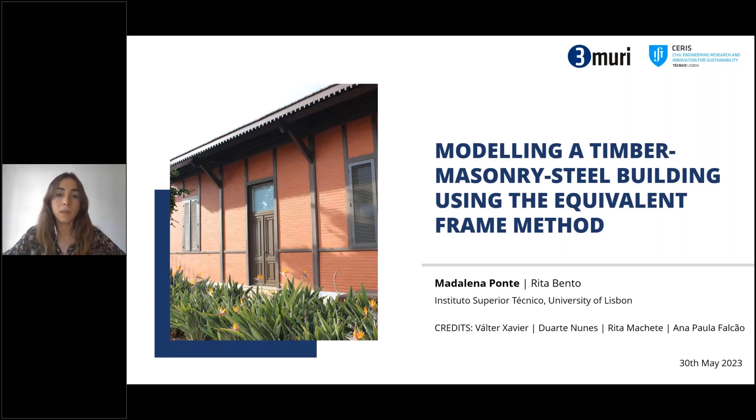This work was carried out in Lisbon, in Instituto Superior Técnico, coordinated by Professor Rita Bento, with a large team of architects and civil engineers. It's about a Timber-Masonry-Steel building using the equivalent frame method, as Professor Pena said.

And I'm going to start explaining our motivation, the case study, which is named the APPI building, the experimental dynamic characterization, then the equivalent frame modeling, the numerical results, and conclusions.

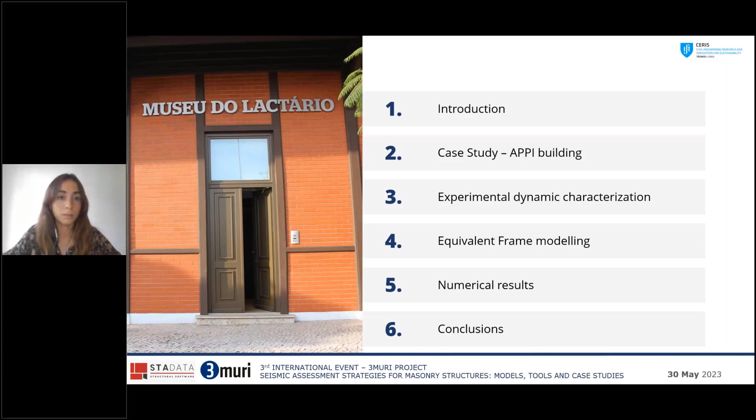So the motivation started with the complaints of vibrations felt by the users of the Association for the Protection of the Early Childhood, which is APPI, the owner of this building. On one side is their museum, and on the other side is their offices. So they felt a lot of discomfort in the offices and in the museum due to the level of vibrations.

You can see the building is very near the river in an area named Santa Apolónia in Lisbon, and a discomfort level assessment was carried out, and what I'm going to present you now is the seismic assessment that came after.

The building was constructed in 1901 in Santa Apolónia, and it was designed by a famous Portuguese architect, Ventura Terra. It is a building representative of the national construction of the epoch for its style and construction techniques, which makes it part of the country's built cultural heritage.

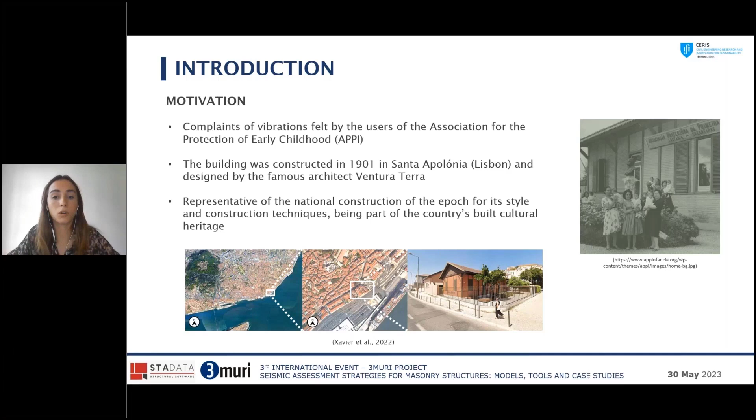The case study, which I will always call APPI to be easier, is almost rectangular, asymmetrical in plan. It's 10 by 22 meters, with walls of more or less 4.8 meter height. To obtain the geometry and the correct characterization of the building, a laser scan was carried out. Also due to the importance of the building, which is a museum, like this we have everything registered.

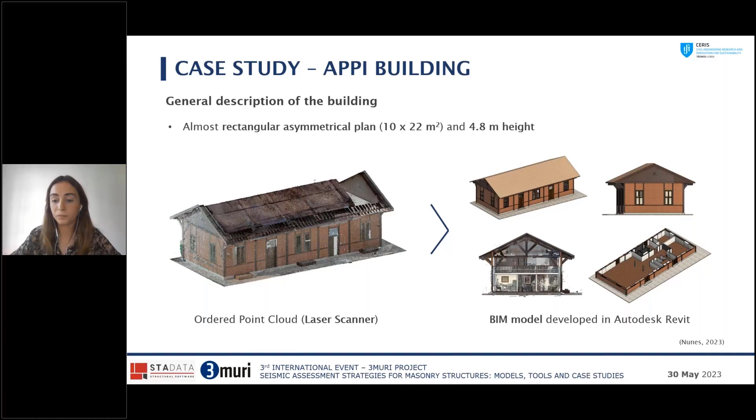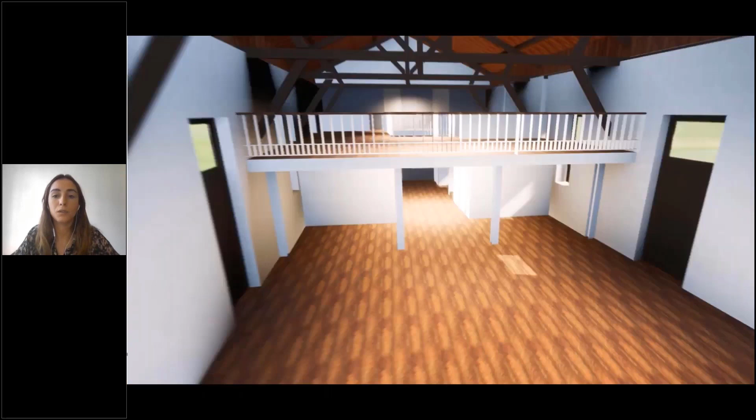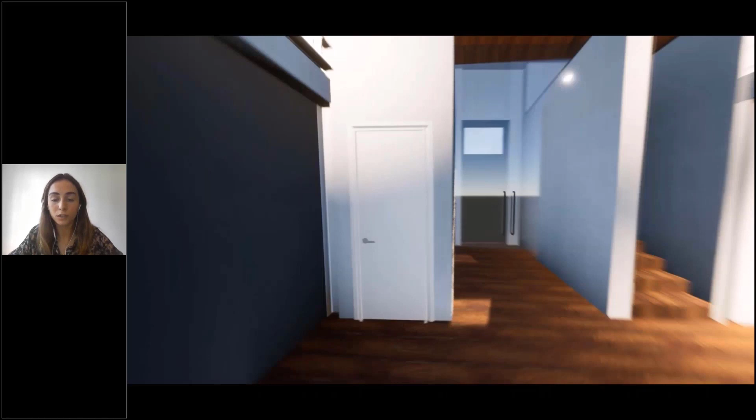The ordered point cloud was created with the laser scanner, and then a model in BIM was developed by a student, which allowed us to then create the numerical model. You can see here we are entering the BIM model. We can see that the building is one floor on this side, and on the other side we have two floors. It is a mezzanine, and here we are passing from the point cloud to the BIM, and this is the part of the offices. So the part with the two floors.

The building structure was renovated in 2014. It had to be completely rebuilt, since it was found out that the majority of the structure was very damaged. So the renovation kept the same exterior layout as the original. They substituted the elements, but they kept the layout with the timber frames and the masonry walls.

But then there was an alteration to the architect's design. They added a mezzanine type steel structure on the inside, as you can see here on the right side of the plan. This is the part of the offices, as we saw in this video. And then on the left side, we have just one story height, which is the museum part.

I also show you the 6 timber frames, because this building, in fact, is a timber building, in which the main structure that carries the loads is the timber frame elements. Actually, this drawing is from NCREP, the company of Alexandre Costa, who just presented before. They did the evaluation of the state of the timber elements before the renovation.

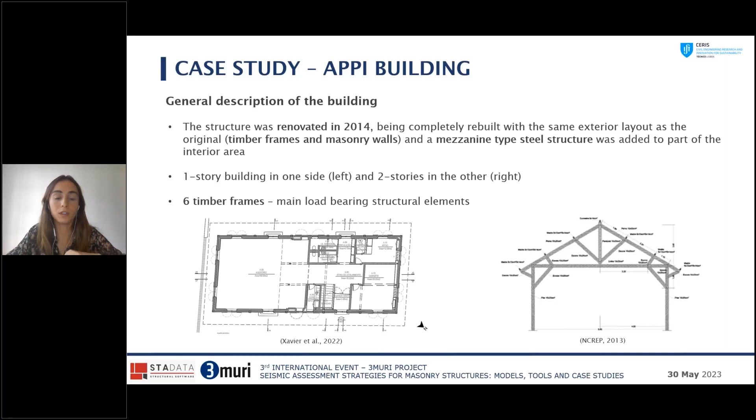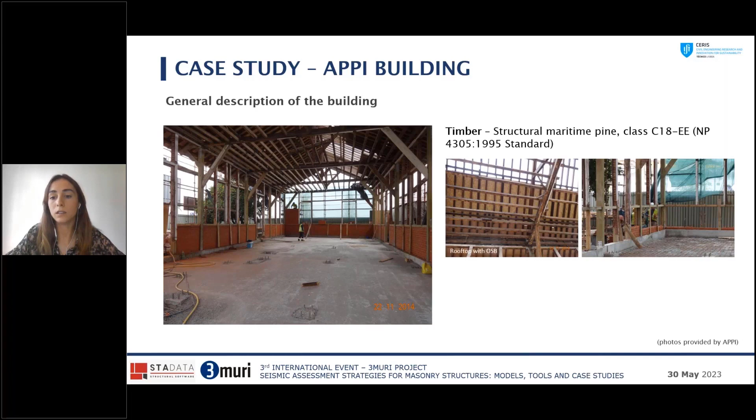And so you can see here that the first part to be built in the renovation was the timber frame. So the timber frame is what carries the vertical loads. The foundations were also rebuilt. The old ones were destroyed. They built new foundations, and then the timber structure. The rooftop is also with OSB flakes, and then they started adding the masonry as an infill.

So the masonry used was the same type of bricks that were there before, so vertically perforated clay bricks with 12.2 centimeters thickness, and the layout was kept the same, as you can see here.

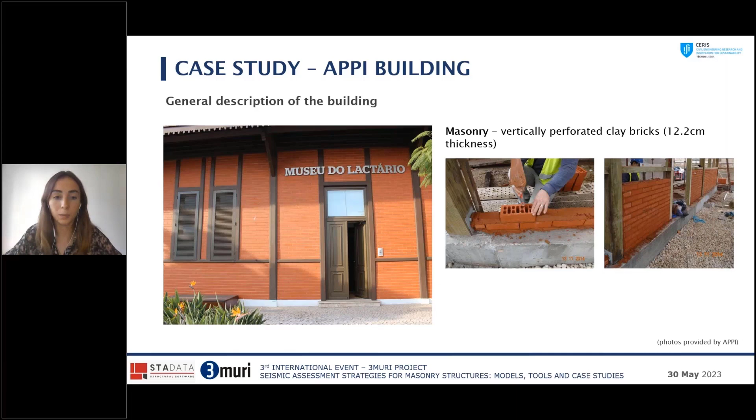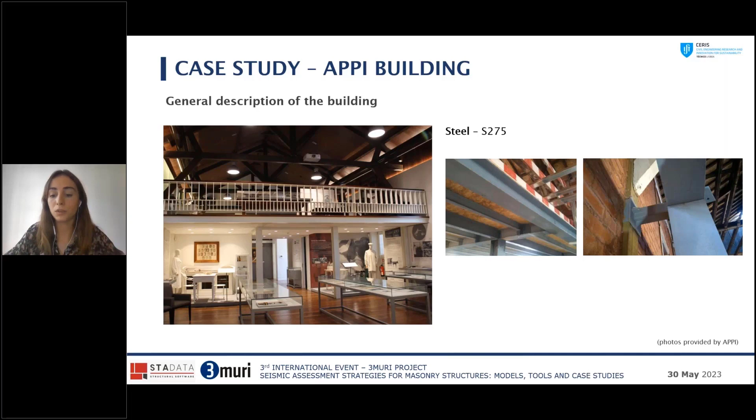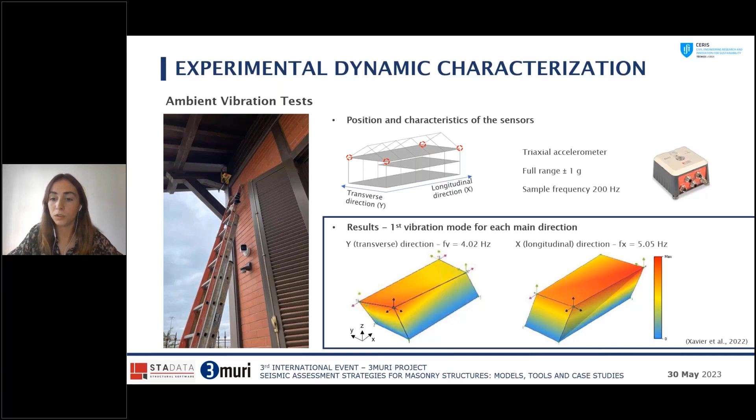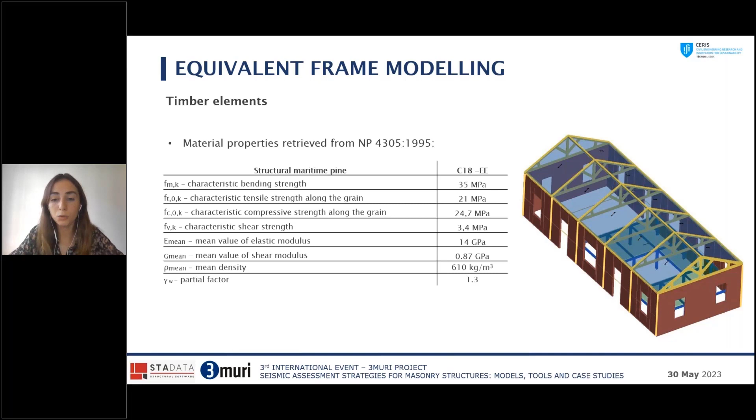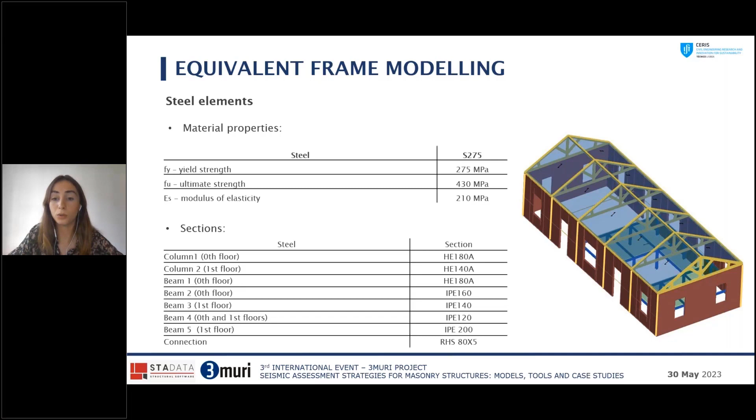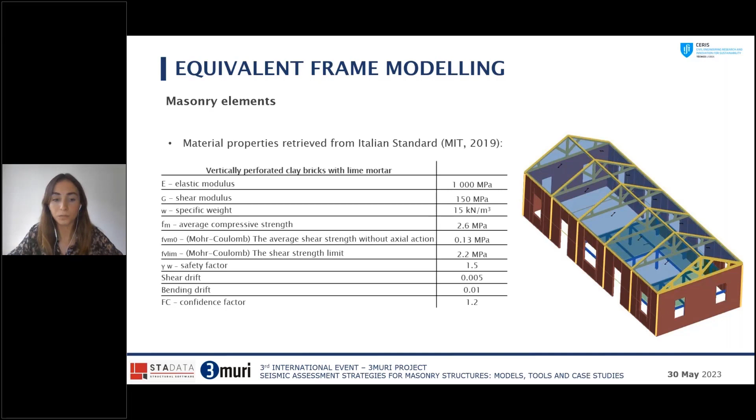Then for the steel elements, we used S275. Everything was very detailed for the steel part in the renovation works. These were the sections we used. And then the masonry elements. For the masonry elements, we considered vertically perforated clay bricks with lime mortar. The values were obtained from the Italian standard, and we also used the Mohr-Coulomb laws, with shear drift and bending drift also defined in the codes, with a confidence factor of 1.2.

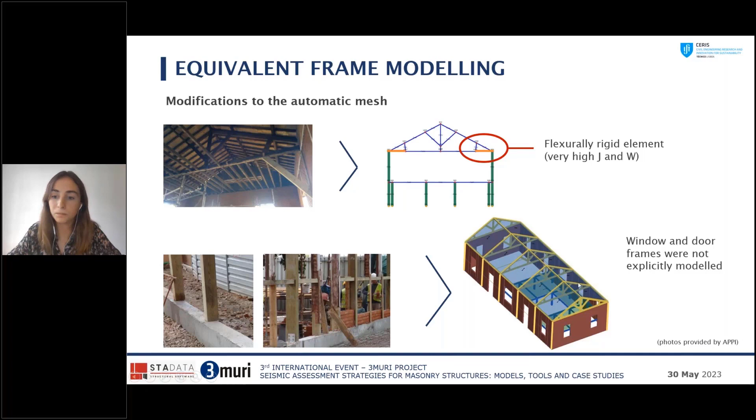But the six main timber frames, as you can see here, were modeled as the structural part, and were in fact new elements connected to the foundation, as you can also see here in the detail of the connection. Also, modifications to the automatic mesh had to be carried out manually in order to represent our real case. As I said, the timber elements around the doors and windows were not specifically modeled, but they were taken into account, as they in fact altered the dimensions of the masonry piers.

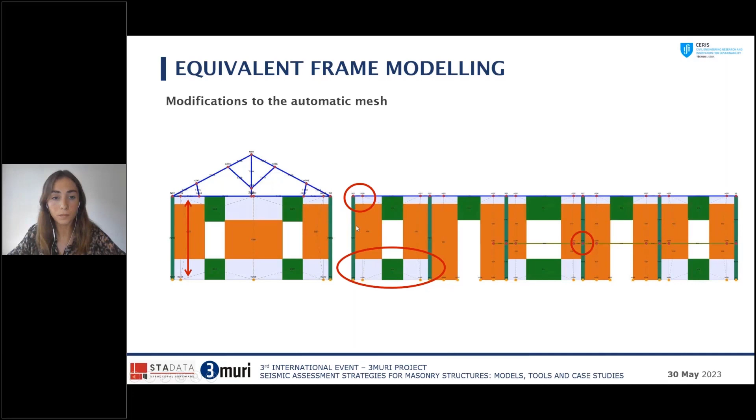About the loads, again, to guarantee that the masonry walls do not carry significant vertical load besides their self-weight, we didn't define the mass of the roof elements, but instead applied concentrated loads where the roof will in fact be supported. So these concentrated loads here.

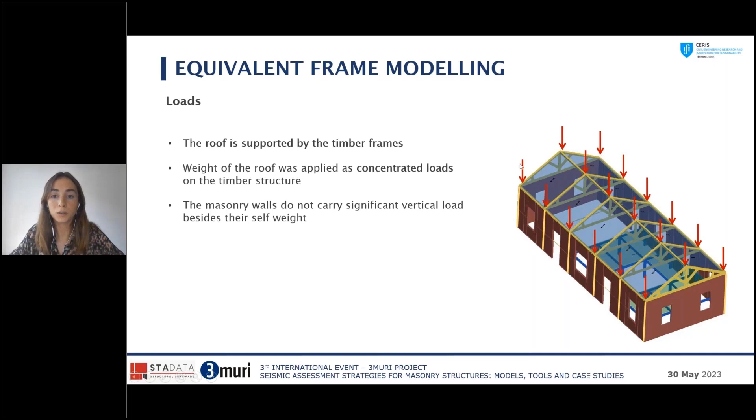All of these aspects that I just detailed were essential to calibrate the model. Some of them we actually did not understand immediately in the beginning when we started to model, but then when we started to calibrate it, we understood that, okay, the structure was built this way, so we have to make these alterations to take it into account. All of these steps were very important. And like this, we could obtain a good calibration with errors of 10% to the experimental results. And we also obtained similar deformed shapes.

You can see here the first row is the frequency in the transversal direction, in the y direction. In the case of 3Muri, we can obtain some curvature in the deformed shape of the longitudinal walls, which in the experimental results we cannot see, as we only used the 4 sensors in the corners. And then the X direction, again very similar to the experimental deformed shape. You can also see here the deformed shape of the walls, the masonry walls with the timber frames, and also the metallic steel elements.

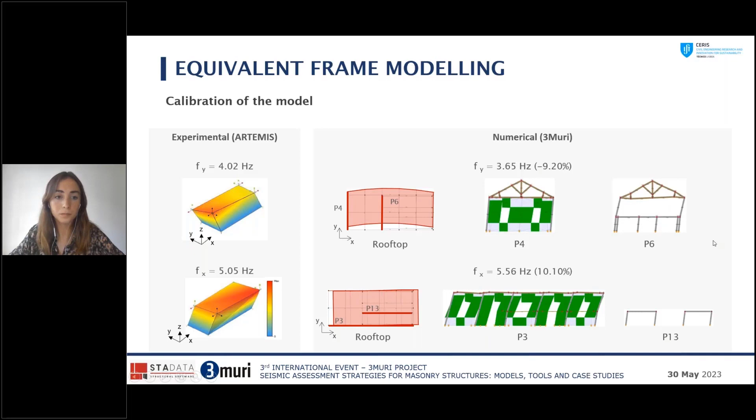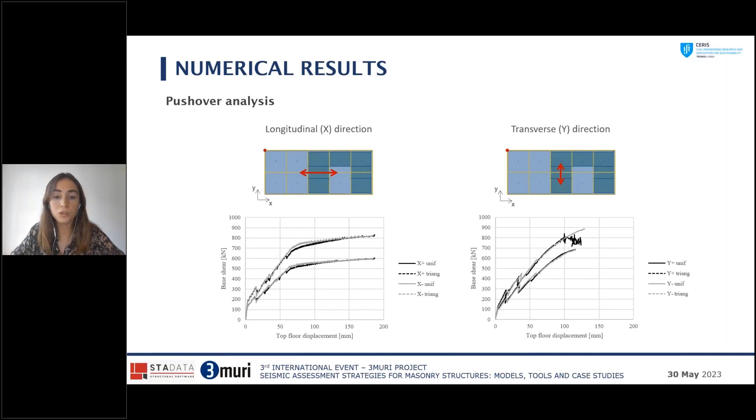About the numerical results, pushover analyses were carried out for the longitudinal X direction and the transverse Y direction of the building, using uniform and triangular load distributions. You can see here that the triangular is the most demanding one, so that will be the one that I will detail the most. Here, looking at the longitudinal direction for the triangular load distribution, I marked 3 points of this curve, as the definition of the ultimate displacement was also an important step of this work. 3Muri continues the pushover curve indefinitely, as there is no drift limit defined for the beam elements. So therefore, the beam elements continue to resist in this building, the timber frames, the timber pillars.

The first point, the blue one, is when all the masonry piers reach the ultimate displacement. So when the masonry is collapsed, you can see here from the colors, all of them reach collapse. This would be the most conservative ultimate displacement, ultimate point. Then we can go along the curve. You see there it still has strength, and you can go to more points. The second point that I marked here is the plasticization of the steel beams. So you can see here, in this case, the beams on the mezzanine, on the floor, are plasticized.

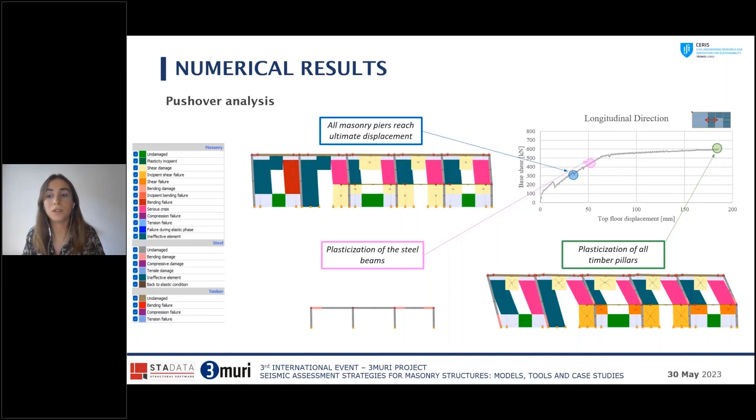And then we continue to increase the strength of the building and reach the point where in the main facade, all the timber pillars are plasticized. So this was our limit. We could maybe exploit even more, but this will depend on the level of knowledge that we have on the connections of the timber piers, the timber columns, to the foundation. So if they are well connected, the rotation that this connection allows or not. And we don't have that information, so we stopped here at this point.

Again, for the Y direction, we can observe the same points. The blue point where the masonry piers reach the ultimate displacement, then the plasticization of the steel beams, and in this case also the columns. For this direction, the steel structure suffers more plasticization, in more elements, and then the plasticization of all the timber pillars on the transverse facades as the last point in the curve.

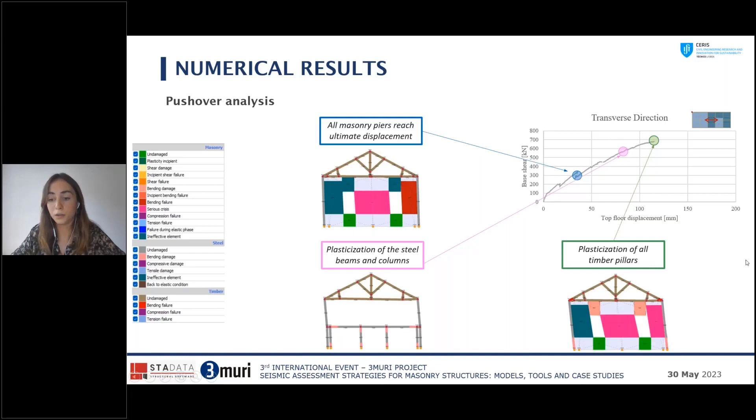So just to conclude, my presentation is almost finishing, and I would just like to say that it's important to know the construction sequence and details of the structure in order to create a realistic model. This was one of the very important aspects while building the model and making sure that it was representing the real structure, as you can see from the details that I showed: the sequence starting with timber frames, then masonry, the connections of the steel structure to the timber frame. And then, even though 3Muri is specialized in masonry structures, we can see from this work that it has the capability to model mixed timber masonry buildings.

There are limitations in the modeling, of course, of the timber steel frame buildings. We see that it's necessary to add the possibility to define drift limits for the timber elements in 3Muri. It is also necessary, though we didn't carry it out here, to evaluate the connections between the timber elements and the steel elements. Also, while modeling this type of building, it might be necessary to manually alter the macro element mesh to better capture the real behavior of the structure, as I showed here with these examples.